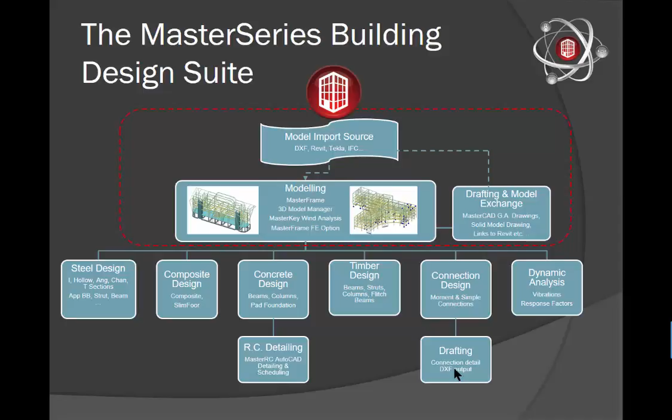And of course we can then send that back through into the likes of Revit and IFC format files through Tekla, and we can also produce RC details and even simple DXF details. The nice thing is you do not need to buy everything, you take what you need, and we'll explore that in greater detail near the end of our webinar today.

Just press escape from that and close it down. And if you're wondering, that is our new offices, 6,500 square feet we're in now. So what I'm going to do is go to my Revit models. I actually have them over here, sorry, my other screen. I'm going to pull up a little Revit model.

We can take a Revit model from the architect, from the fabricator, from whoever, and go into our own add-in, Master Series Link Manager, where we can create a link, save link settings, or submit changes to the link. This special little add-on we put into Revit allows you to submit all your data, and it's sending that out to Master Series. We can see we exported frames, columns, walls, two material types, 33 sections, one floor, some grid lines and levels, and everything. So just close that down.

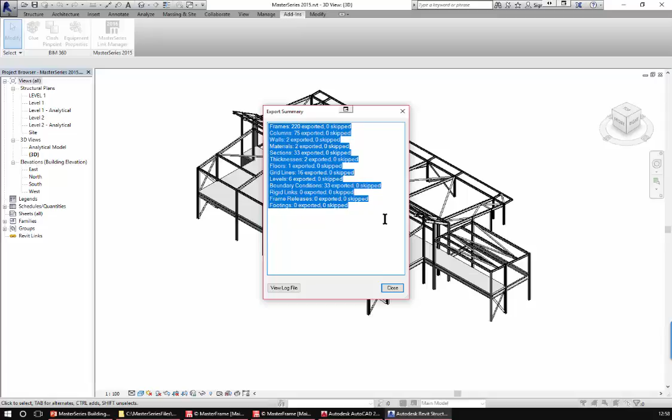So that's coming out from Revit. Just to save time, I will show you the model coming into Master Series. Here we are in Master Series, looking at the same model that's come through with all its cellular beams, and I think we did play around with this - we have a large section here, some finite element shear walls,

and we have some haunched members all coming through nicely into our Master Series model. We can also handle the IFC format, which is used by Tekla and others, and bring in models there. You can also start from scratch, bring in a plain DXF file, use it as a basis for your model, and draw over it to import your wireframe from there as well.

As well as importing models from predefined systems, we can also generate and draw our own models, and it's a very, very straightforward CAD style application.

So if I wanted to go in and create a new member, I can come in and say I want to put a UB, and actually put in a column. I'm going to say UC, and it's going to be 203, 203. So what I'm going to do is put it over here, out here, and that's snapping because of this grid, and then I'm going to raise it up, and if I just rotate this around, I'll be able to see that I'm snapping across there. So that's that column. I could of course have rotated it through 90 degrees beforehand, and if I just do that again and then repeat, we'll see that it's now in the same orientation.

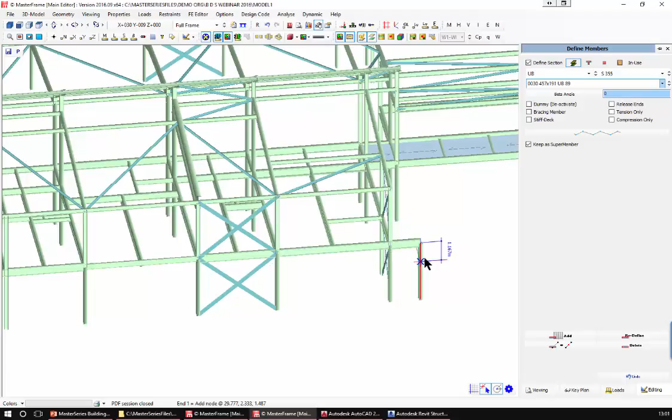So flicking over to a beam, we'll take a nice light beam. As you can see, I've got all the different section sizes and different types. I can now place a member, and in this case it's been rotated through 90 degrees. So just come back, 0, draw it again, and continue. I can also draw things into other frames.

So if I was to come along and say that I wanted to put some trimmers in here, I can just choose something very small, like not a W section, a CHS, and put in something very small here, say a 60 by 3.

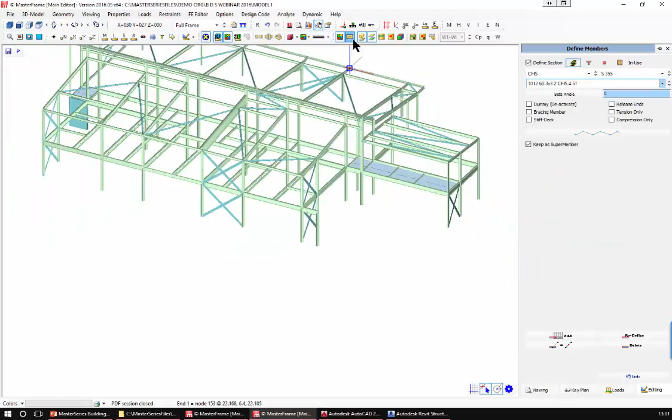I can come in, and if you look carefully, I can snap in this case at 100 mil centers, but I can just run along and type in 1.258, press enter, and it knows that that's my start point, and then I can come orthogonal to that, and I'll see if I turn on my lengths that that is the 1.258 length.

So I can override any distances. I have some fantastic tools in here for generating, and I definitely don't want to see my lengths anymore. If I take, for example, this sloping member, I could create, and we'll just stay with a circular hollow section, I could create another member coming down, and I can say I want to hover, hover, hover, and I get that as a member reference.

There we go, and I can now use that, and I can say at that slope I want it 1.9 meters long. So it's now drawing it at that member slope but coming out. So I have all the standard AutoCAD type tools, plus some more that we feel are relevant, and we're generating our members as we need to, and we can create plane frames, space frames like this without any problems whatsoever.

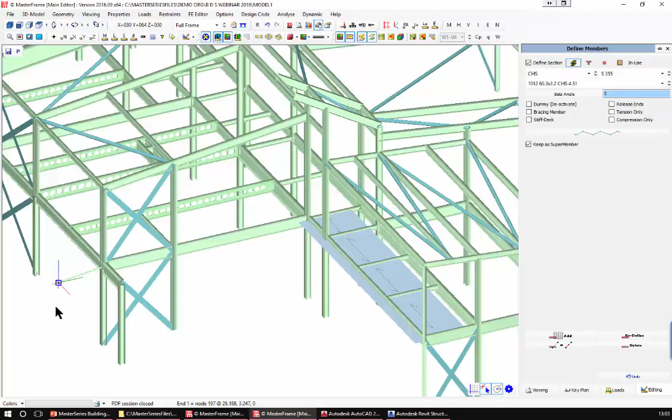So moving on, and if we look at this little frame in more detail, we will see that we already have the grid lines came in from the Revit. We also have all our levels input, and we have some panels already generated.

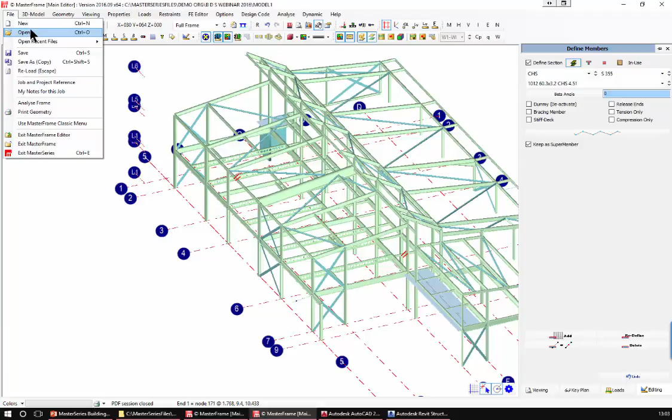But I'm going to close this down because I want to look at some typical frames for a moment, just to give you an idea of the sort of stuff that we do, or should one say correctly, our clients do. So I'm going to open a file.

I'll not save this. So I'm going to go into here and look at some typical frames: roof frames, a two-story building, nice multi-story buildings, a lovely building with a curved front facade, a school on 3 floors, and then we have another office block with a lot of overhangs, and a nice multi-story, I believe that was apartments.

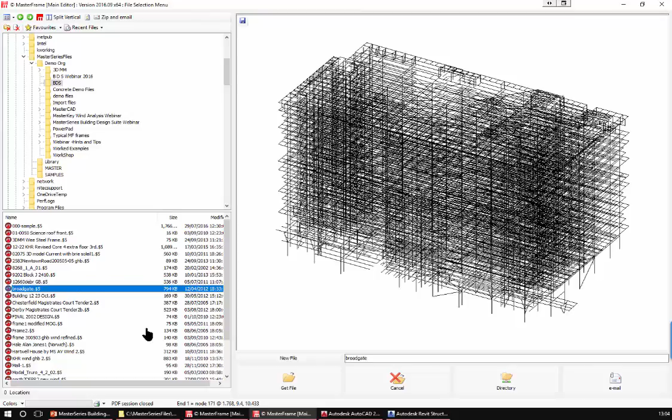So we can do quite a range of different, very complex models. This is just some of the stuff that our clients themselves do on a daily basis using this system for us.

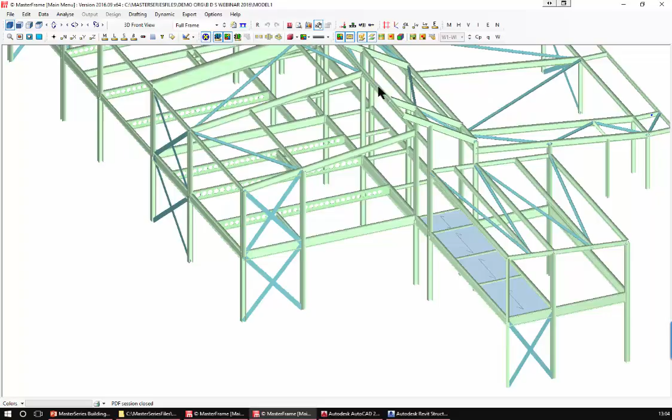So I'm going to cancel that, and I'm going to close this down because I don't want this anymore. And just to save time, I have another frame analysis in the background I'm going to work on. So just close that down and pop this one up. So this is the little frame I'm going to work on.

I'm going to walk you through this frame, and we're going to look at everything that we can do inside this frame. This is not a typical frame, because when we turn on the 3D, we will see, first of all, we have concrete in grey, we have composite beams in yellow, steel in green.

And we also have these big FE shear walls and flat slabs, and we have a shear core with some nice openings put through it, and if I rotate it you'll be able to see with the shading all the openings.

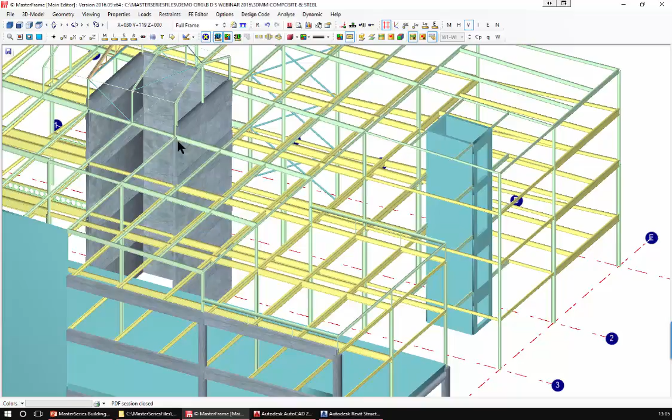And just because this is a frame I've used before, this is an old style rigid link type of members rather than the FEA. So if you're a smaller user and you want to use just a simpler method, you can.

And because this is claimed to be multi-material, I have up here got on my roof a portal frame with some bracing, and I just, for the sake of demonstration, put in a nice timber truss.

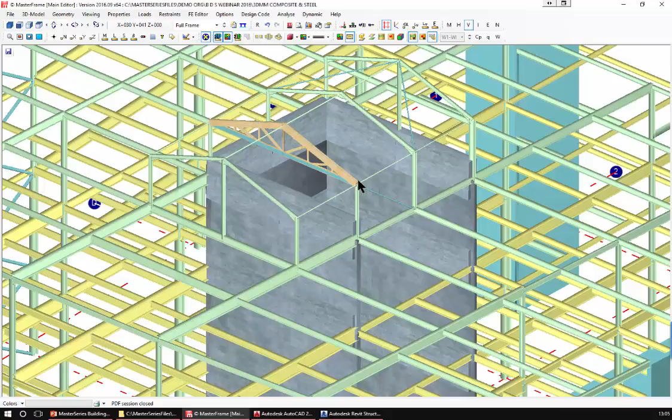And since it's a demonstration, I made the top and bottom members flitched beams. So this is a flitched beam with 2 plates on 1 wooden beam, and the top one is 2 beams and 1 plate. So we can do both styles of flitched beams.

We can also do them top and bottom if you so desire. So that's my basic frame. Not that basic, and we'll see we also have cell form beams and we have asymmetrical beams in the system.

So now, moving on, the next thing I want to look at is the loading on the frame, because that's one of the big things. It's easy enough to bring in the model from your CAD package or your architect.

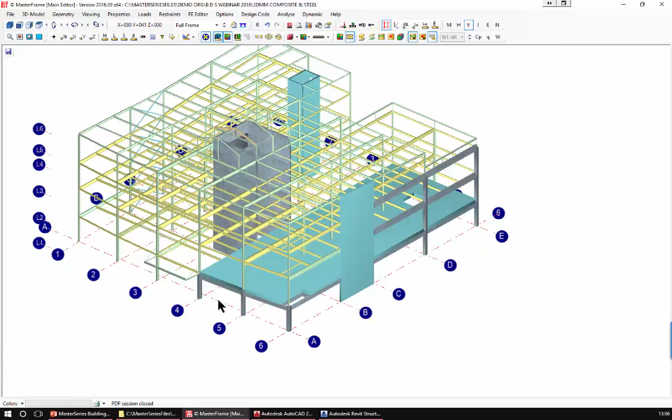It's easy enough to put the section sizes on. The next thing you have to think about is getting the loading on the frame. In the old days, you went member by member, not any bit more. These modern systems allow you to do something called area loading.

I'm just going to go back to wireframe, it makes my life easier. Now I'll look at gravity area loading. Using my levels on the left hand side, 1 to 6, I've set up at each level the designation and the loading: services, mesh, density, and the loads, superimposed, dead plus live load.

So we're seeing a 5 kilonewton load on the first floor. Second floor is the same. Third floor is only 2.5, must be domestic use rather than commercial. The roof is 0.75, and then the plant roof is 0.6 and 0.25.

So we've been able to set up on each level what we want to use for the loading. We've also been able to tell it whether it's composite, and we can see it is not composite on the portal roof - thank goodness. So I'll close that and move on.

So what have we done with these? If we turn on our area loading and draw the gravity area loading, we will see that we have different intensities on each level. Out here we've got a different intensity because we overrode the default for the level and said no, out here it is only 1.5.

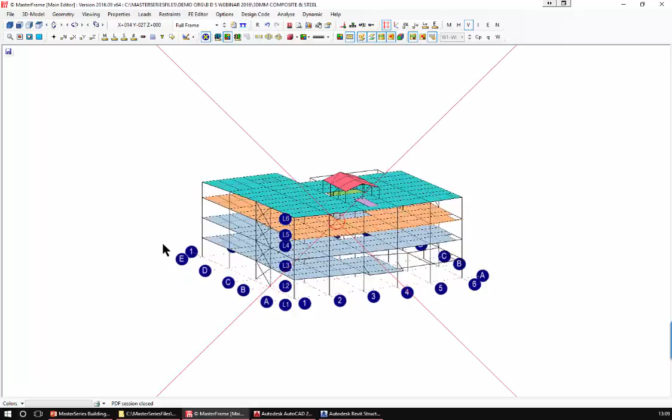We can also apply patch loads. So somebody has put in a plant patch load out here, and we also have the ability to place line loads. If I rotate around, I believe somewhere somebody might have put on some line loads - there were some, but it must have been deleted, not to worry. I can put a line load on very quickly for you. So that's how easy it was.

Apologies, I'm just going to turn all that off and come down into a level. So let's go and view level 2 - this is my level. I'll put it into an ISO view so it looks nicer. That's just coming up from the shear lift shaft, we'll not worry about that.

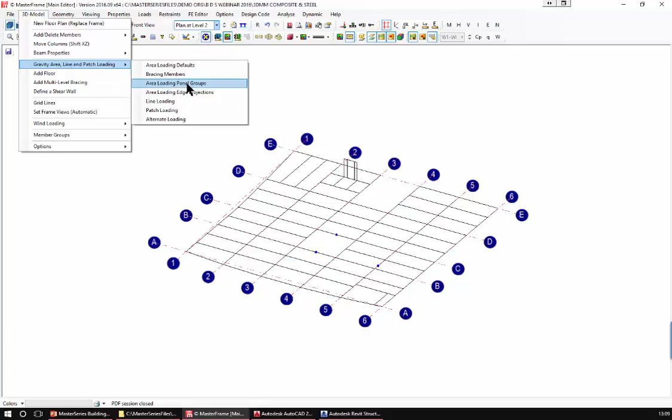But coming through into my areas, I can now look at the panels. I can see this panel's been defined, and if I find this level and click on this one, I can see that we're all spanning this direction except for these ones over here which are spanning in opposite direction, because I told it to go by shortest.

If I wanted this one and this one to also span the same direction, all I'd need to do is make a local change, choose the panel and change the direction to be that way. Take this one, change the direction, and I've overridden that. While I'm here, I might as well put an additional 2 kilonewtons of additional load onto that panel.

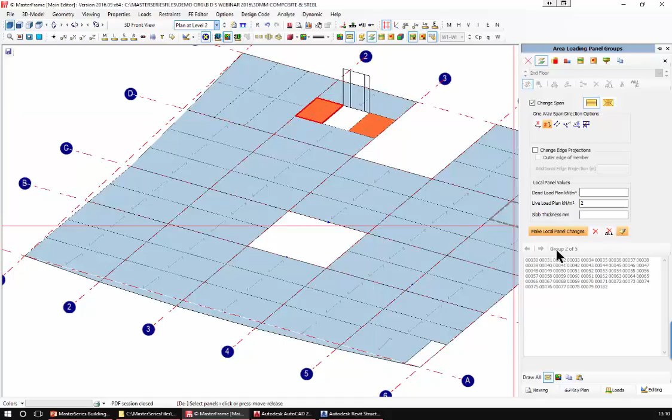That's how easy it is. And if I wanted to, I could then copy that over to that one as well. So I've now changed the loading on those.

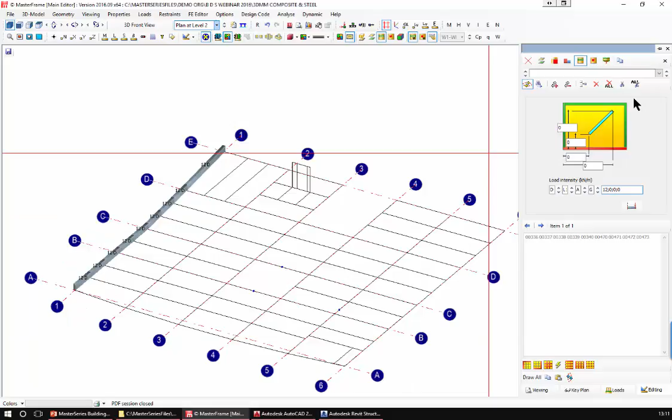I said about line loads, so let's put a line load on here, along this back wall. I'm going to put it all the way along here, and give it an intensity of 12 kilonewtons.

So that's a 12 kilonewton line load on that level, and I can put those internal, external, wherever I want. So now we have changed some of the areas and made local changes to the loading. Let's go back out to our full frame and look at the area loading again.

We should see when we put on our patches and points, we now have this line load - I don't really want the values shown, not as pretty at the minute with the values. And we'll see back around here on level 2, there's the two panels we changed the direction of and applied an additional loading onto. So loading is very simple to apply and very, very powerful. That's your general frame.

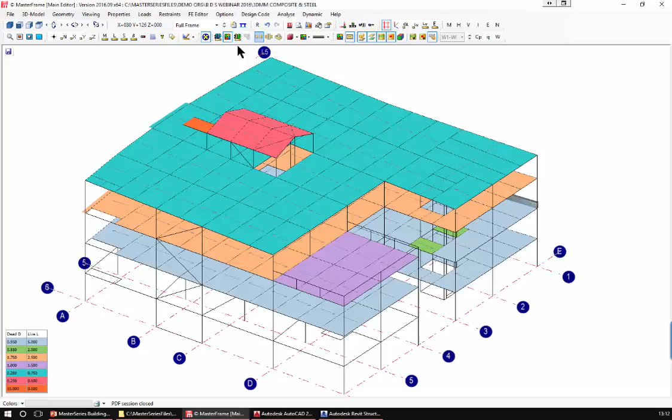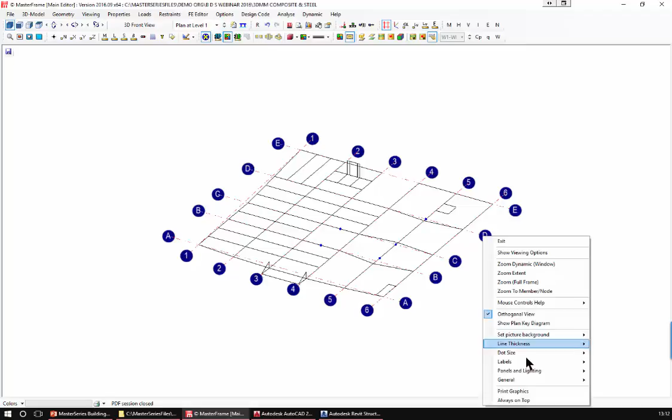The other area we want to look at here - if I come down to the first floor and turn this off, we have FE meshes. So we have an FE frame, and if we go into the mesh, we'll see this is all one area. I'm going to ask the viewing options to show the FE meshes, so we're only looking at the FE panels. If I now go into the FE editor, I have my surface, and I also have attached beams around this, and openings. I have an opening here, and I also have my loading applied - several different loads, some line loads on the FE surface, a couple of point loads, and an awkward line load on the FE surface. So it's very flexible and powerful.

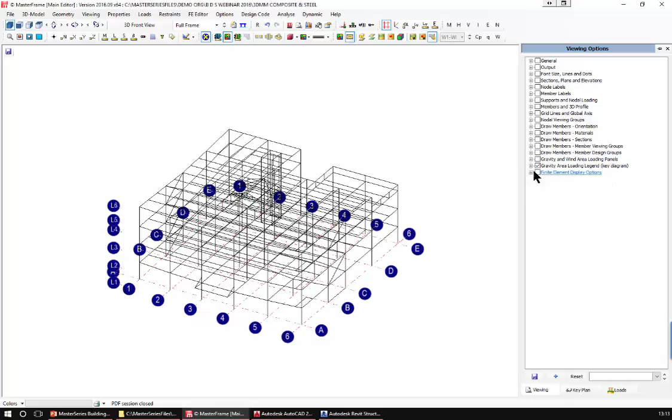If I now come back out to the full frame and go back into the viewing options, ask it to show everything again, thank you very much. Now I'll just turn off my grid lines. The next area is wind loading, and that's obviously another minefield.

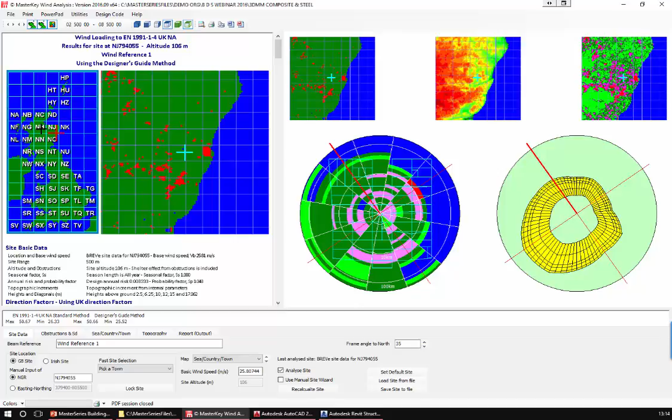So if I go into my wind loading, I can go in and say where the building is. If I'm in the UK or Ireland, I can immediately go into either my GB site or my Irish site and locate my building, which is looking to be, if my guess is right, up near Dundee somewhere. I do have some basic towns I can choose - if I go Dundee... no, I was a bit too far up, I was probably at Aberdeen, not to worry. So we're now in Dundee, and we can see our fetches, the topography, the orientation of the building, everything in here. We can see our roughness factors and our altitudes, all the details, and we can come down and see all the different pressures at the different levels in the structure - it's automatically pulled all that out.

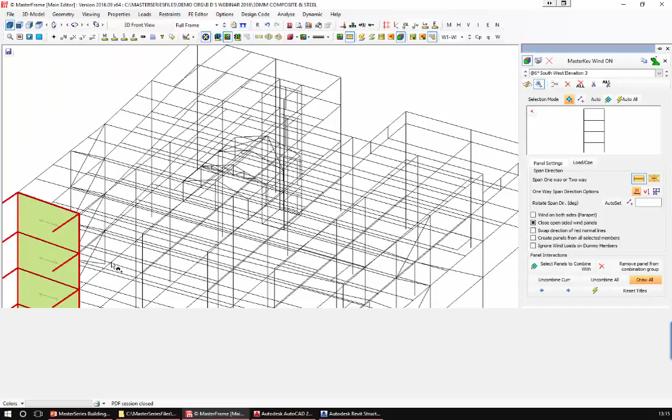So all I need to do now, having chosen my site, is to apply the wind loading surfaces to the members. So let's look at the wind panels. Don't know why I've lost a wee bit there, just a second... and I pull that back again. There we go, Windows just wasn't updating the screen.

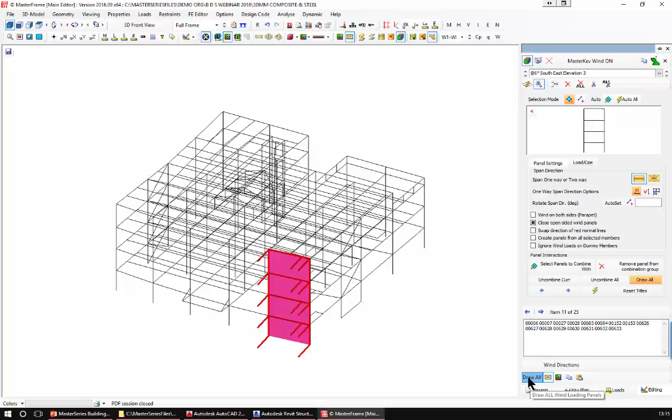So these are my little wind panels that I've got on the structure, and if I look at them all, you'll see I have quite a few different panels generated. So what I'm going to do first is just kill those, kill them all. So I have no wind panels, and I can come along and add a panel, saying it's from there to there to there, and even these - well, it doesn't like those because they aren't part of the same group - and up to there. I can say I'm going to span horizontally or vertically - I'll stay horizontally because it's going to be sheeting of some sort. And I can then go and do another one. But of course we don't need to, because what we can do is delete all that again.

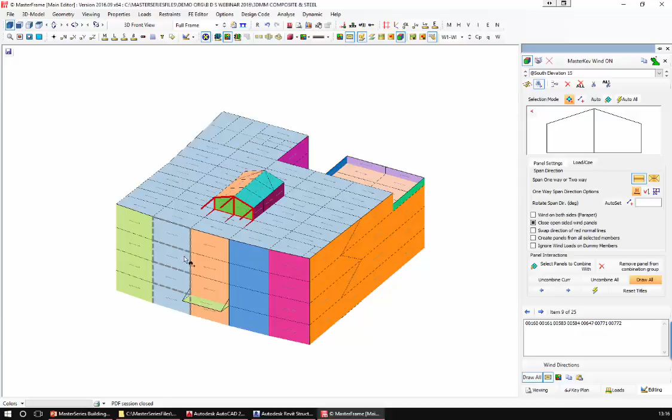Instead, I'll ask the program to have a go at finding all the panels itself, and in a few seconds it's identified that these are curved surfaces, so each facet has its own surface. You'll see we have a parapet separate from the rest of the wall, and we also have here a canopy, and then our dual pitch roof loading. So that's my wind loading all done automatically, very simply and very professionally.

So let's just display that again outside here, and then let's look at our wind loading. We can see the pressures, with our high suction getting lesser and lesser as we come across the structure. If I turn on my Q values, you'll see it's 0.6 coming down to 0.2, and we're getting another capture in here due to the re-entrant corner. Wind blowing in this direction, we go from high pressure down to low leeward, and then again in the opposite direction - we'll see all of these coming through nice and neatly. Then with internal pressure, if we want to consider internal pressure or even internal suction, all these are automatically calculated for you, and you can even look at the coefficients rather than the actual intensity values, and away you go.

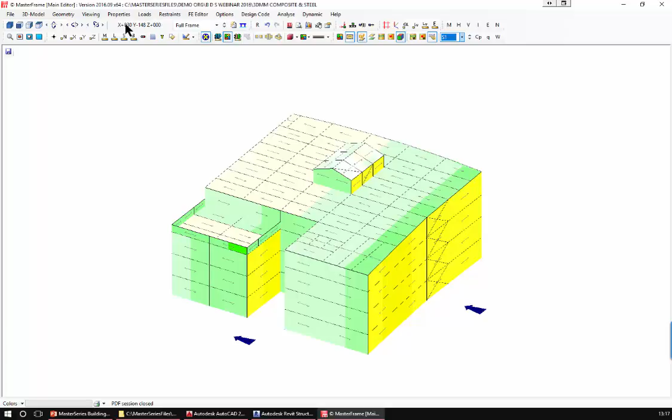So that is so simple in its generation. Now lastly, in the analysis end, we need to look at loading cases.

So loading cases, we have our loading combinations, very straightforward. We work primarily with the two design codes, British and Euro codes. We also have South African, but our primary codes are British and European. We do not do American, and we do not do Indian codes. I know that was a question asked by some people, and I apologize, I should have said that earlier.

Now you have all these different loading cases and permutations set up, including sway stability as equivalent horizontal forces and notional loads to check the stability of the frame and all that. They can get quite complicated, but we also have this system where we can come along and generate different permutations of loads.

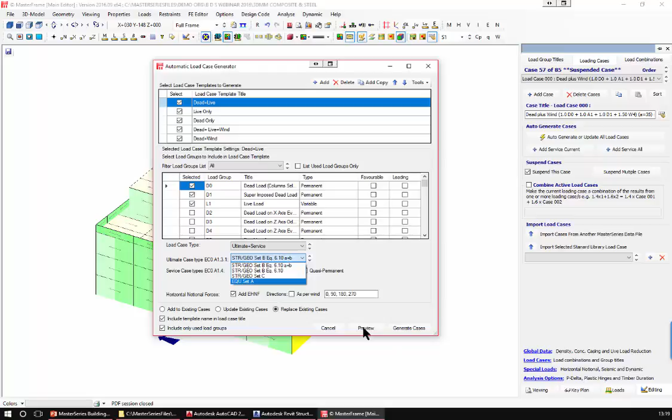As you can see, we elect to use 6.10a and b, but you can decide how you want to do it and apply all the values. But I'm not going to do that because I've already analyzed this frame, so I'm just going to say cancel.

So loading combinations, superb. We can also do the P-delta analysis. You can have plastic analysis, saying this member could form hinges, and as it analyzes, it will form the hinges and redistribute if required. So I'm just going to come out of this, and I'm not going to save it because I don't want to spend the time on the reanalysis.

So there's my frame, and in case you haven't gathered, all the different colors represent different section sizes. Now I'm going to turn off the multicoloring, and we want to look at output.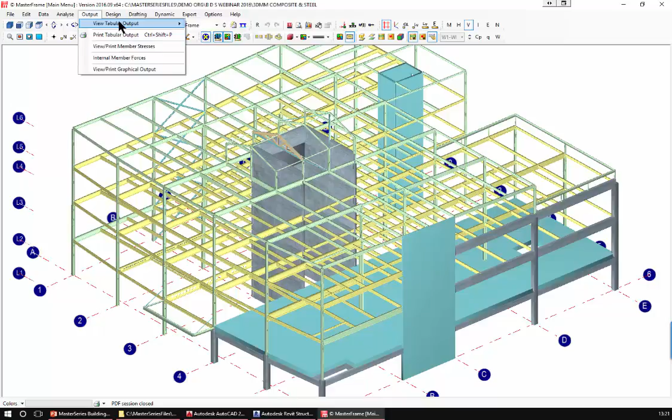We naturally have all our tabular output as you'd expect, and we also have graphical. So in wireframe, there's your FE mesh, by the way. You have all your bending moments.

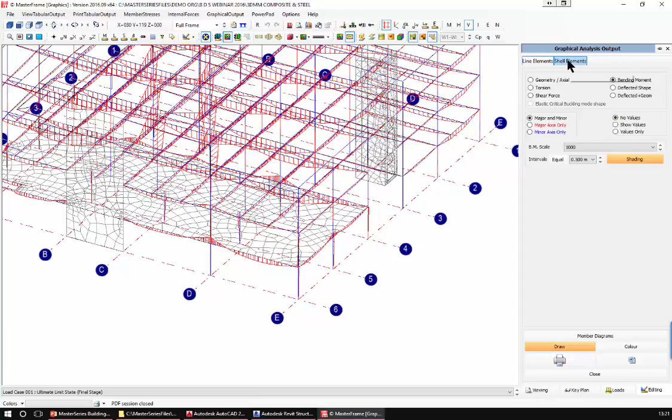If I come back out and change the scale, you would see that kind of makes sense, what's happening there, and you'll see the moments around the edges of the FE slab because we're doing a combined attached-to-beam analysis. And we can then go into the shell elements for our surfaces.

So I'm just going to look at plan level 1, and the first thing we're looking at here is I'm just going to come down and look at one of these loading cases, and I'll see my maximum MX moments on my structure.

I will also, just to give you an idea, I always think it's a good idea to check the movement of the structure, see how it's working. This is our deflected y-axis, and if I go to contour map, again I can see how that's working.

So we're under all spans loaded here. If I do my alternate one, so I have max here, min, max and min. Obviously this one's got a big opening, which does compromise its stiffness, and therefore it does want to go down.

But if I then switch over to the second alternate, you'll see min, max, min, and oh, that's not very happy, max. And then of course we do the same in the opposite direction.

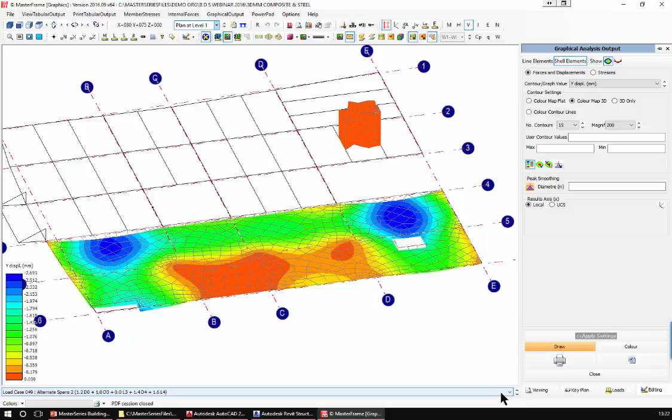So we get our maximum over here and our minimum here, I believe. Or is it the other way around? No, it's minimum here, maximum here. And then we flip that side and do the opposite there. So we're able to do all our nice patterns of loading on our FE shells.

So that's your displacements, that was your MX. More importantly is the MRX and MRY, the wood-armer moment. So we can see the big spikes here.

And I have already asked it not to do peak smoothing. With peak smoothing, we can take out the big contours. So if I go 3D, you'll see, actually 3D color's nicer, the big peaks here over the column heads.

And I didn't mention before that my superstructure columns are not coincident internally with the ground to first floor columns on this slab, so there are big problems there.

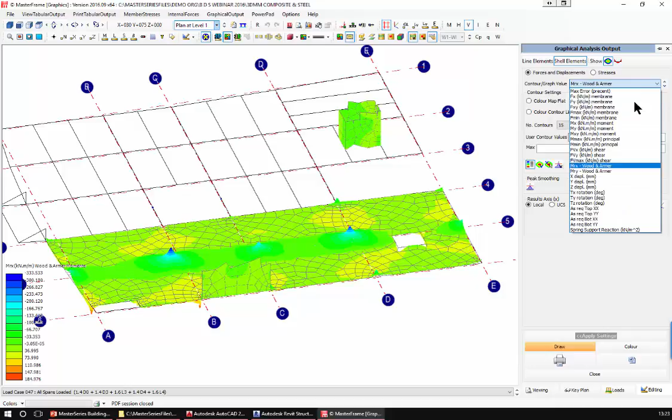But we also have a lovely additional tool that we can use in the FE as part of it, and that is these strips. So if I look at my strips—did I save my strips?

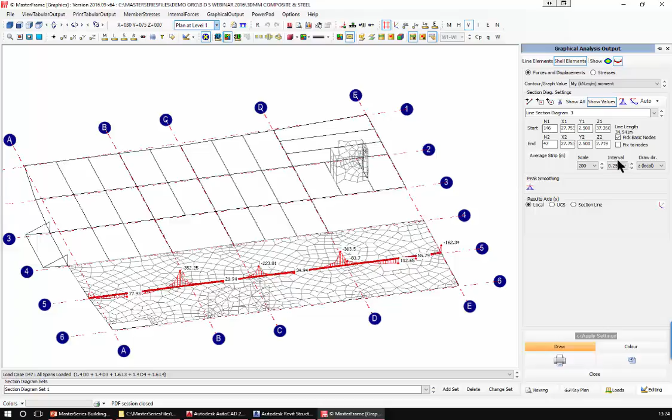There we go, that's strip 3. And if I look at my MX or my MY, we will see the nice diagram. So if I go up to the MX, that's spanning that direction, and if I come down to MY, I'm just going to scale that up a wee bit so you can see it. So 313 is my major moment here, and 352 there.

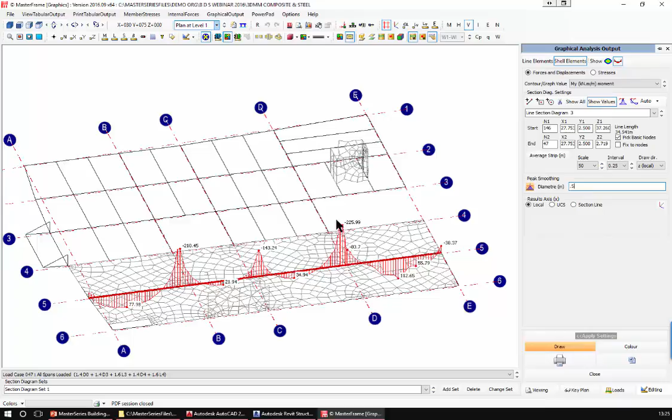Designing for that will certainly work, but that's really overcooking the whole thing because that's a point peak moment. What we can do is a bit of peak smoothing. I can clip these to 0.5 of a meter and apply, and we're down from 300 to 225.

But more importantly, we could turn around and say, well, I want to average this over 1.5 meters. And that's pulled it right down. So over 1.5 meters of column strip, you only need to design for 200, not 315 of force. So these are all very, very powerful, useful tools for designing your slabs.

So that's just a wee bit inside the FEA. Let's now move on, we are at pace, so we've looked at analysis and FEA in the first half hour. We now want to cover all our design, so closing that and coming out, we want to go into design.

Let's go back out to full frame, and first of all let's look at steel design, at my member here. And if I just go and say, right, let's look at the roof, because really the roof is the most important area, because most of the rest is composite.

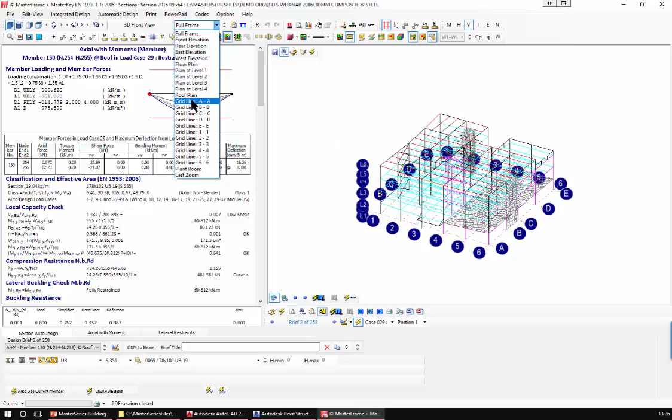So what I'll do is I will just go for roof plan. That's the plant room roof, so down one. So we're now into the first floor, and I can see each of these members is giving me capacities.

Some work, some don't. So first time round, I can come along to this member and say, you go and auto size that. I can also ask it to auto size all the visible members. That's brilliant. But just for a second, imagine we have auto designed it.

How do I know that they're all working? Well, that is where we use the fail button. We can scan this view and it's going to run through and find for me if any members fail.

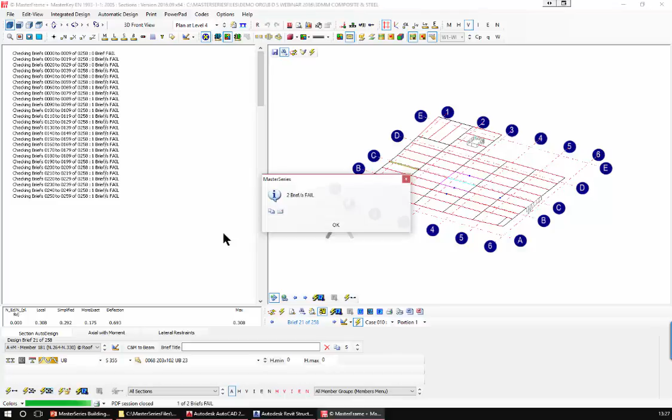And just while it's doing that, I think Martin has looked after all the questions. Only 2 members fail in this area, and it takes me to the first one that fails.

But one of the nice things is we can then move to the next failure each time, and we can go between the two members that failed. So it's this one and this one.

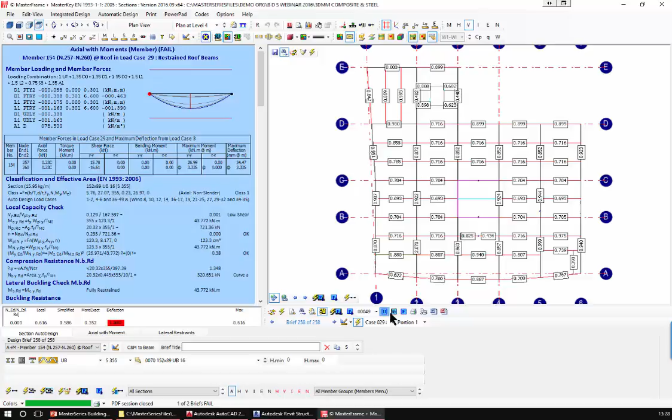And then I can actually, putting it back into plan view, I can now see all my unity values for all the members except for the one I'm looking at. We can see that fails by a value of 2. That's failing by 1.8. I can now reduce that to the most critical for each section size, or more importantly, just to the failing ones.

So I can go to that failing member and ask it to resize. Go to this failing member, and it's also tight. Ask it to resize, and about that effective length, because it's taken all the intermediate members and used those to restrain the members automatically.

And we can see this works. So that's a 54 section, but I could possibly, by scanning and sorting by weight order, get down to a deeper member that would work, and I might just do the same over in this member as well. So that was that member.

Back to this one, it's a very light section because it's in the roof anyway, so not to worry. But the others are sorted by weight order. I wouldn't like to go any lower than that.

And we have tools that can allow us to filter. So we can actually say in our design, never give me anything less than 130 wide flange. I can limit certain criteria, or I can tell it never give me a depth greater than 500. So 457, great. 533, no, won't like it. So we have those sorts of tools and facilities as well.

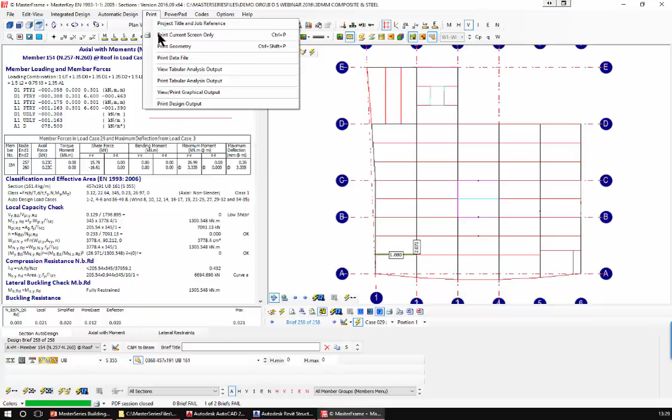From an output point of view, it's just telling me I should reanalyze because I've changed something, but I'm just going to scan for visible failures, and it's going to walk through these and give me the unity values of all of them, trundling all the way down through them, and then highlight the ones that are failing. We've done our design of steel.

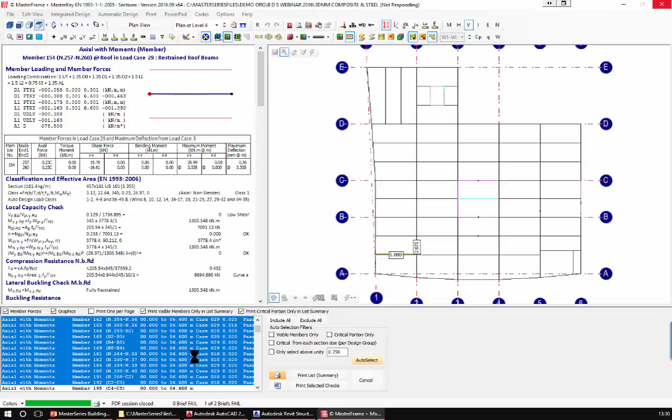We can then go in and look at our concrete design and say no, we're not going to do our pad foundations anyway, we're going to have it onto piles or something, so we won't be doing pads. So we can design our attached beams, and yes, the attached beams can look strange.

I'm going to up this to 16s, 420s, and that's all okay. And then in the bottom, I'm going to increase that from 16s to 20s, and that now is a solution that's working.

If I come across to somewhere like here, we'll see also on my design of my L-beam, I have quite a deep 450 deep slab because of those point loads from the upper floors coming down. It carried an upper floor plus a roof onto that slab.

On my upper levels, I then have a more traditional set of reinforcement, and you can see that I'm able to put 2 layers of reinforcement, and we can see our shear drag and everything for our design.

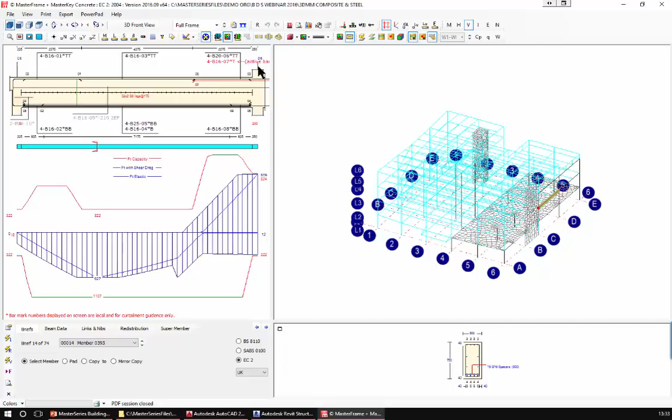And anything here that I see, I can say, well, would I get away with only 3 bars or 2 bars? And no, just using the mouse, I can change that. And we do have the auto design function as well.

Column wise, so I said I wasn't doing the pads. Column wise, they're looking to be good, upper column, and that's looking to be good on upper column. So I can design all of my columns, all my beams, and the slabs were designed inside the FEA because that's an FEA criteria. And that is how simple it is to do the concrete design.

We can analyze and design single members. So if I took this column, I could just analyze that and resize that, and it comes back correct. If I was just to go and change that from 16s to 8s and then resize, you'll see that it comes back saying we need 16s and 2 16s.

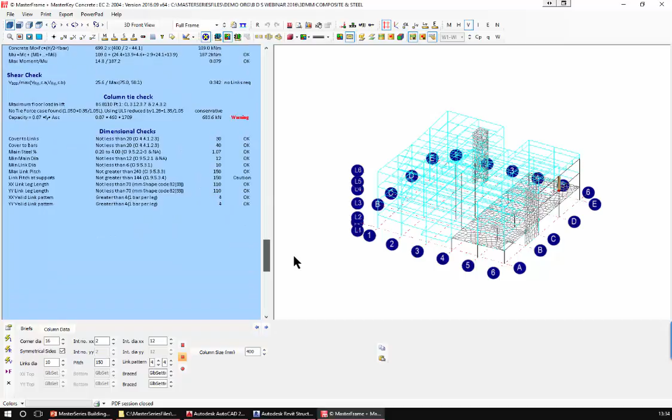You might get away actually with 2 12s. No, we wouldn't. We wouldn't get away with 2 12s per side because we are going to have a problem with our tie force check from the loads above and below. So I am just going to, for tension purposes, bring it back up to the 16s.

And we can export that to DXF. We can print out our diagrams through into AutoCAD very straightforwardly. We can also interface with our Master RC program.

So we've done our steel, we've done our concrete. We haven't saved anything, so we can go straight back into composite design, the third material.

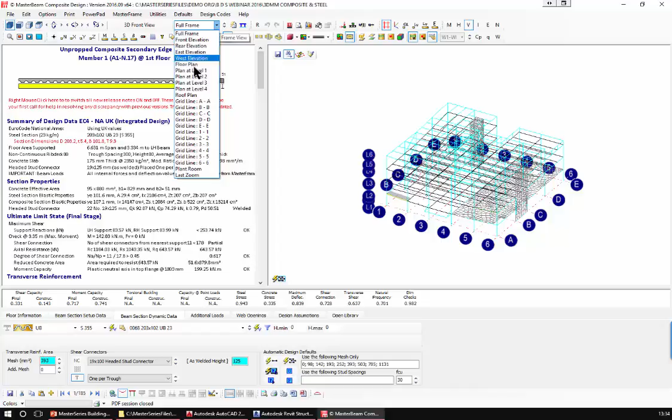Fourth, if you consider the finite element. So let's look just at, say, level 2. And again, secondary beams, failing, passing, or not passing, failing, and primary beams. So big primary beam here, and it's failing.

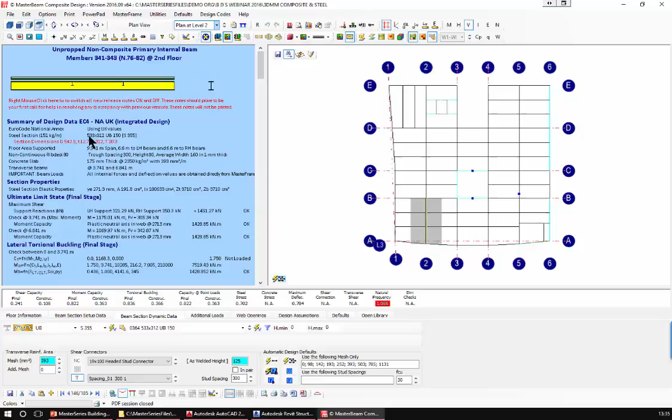I can ask it to go ahead and resize that, and it's going to attempt to do it, and it's not getting very far. I forgot I still have this 500 limit on my sections. It is working other than the natural frequency, but we can ignore that, as we would probably do a response analysis on the whole floor. So we have that facility.

Naturally, you also have this showing up of all the unity values on the members I've already looked at. So scanning for failures would actually show up all the ones, or you can just pick them one at a time, and you can see some of these are working, some aren't, because we haven't gone through and done an official detailed design, including on all our edge beams. And we can do that quite easily, but time is of the essence.

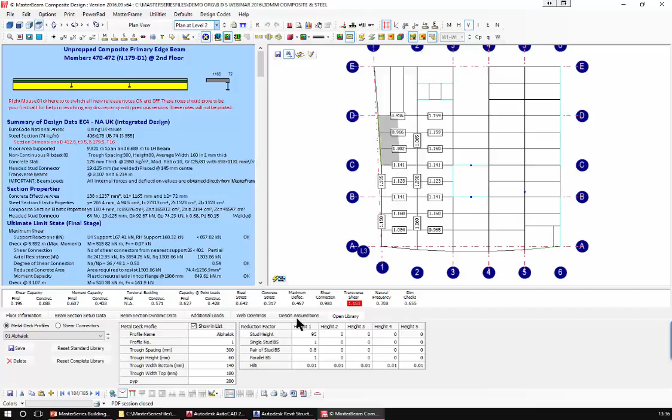We can at any stage design web openings, so if you wanted to put an opening into a beam, you can, although in this case the opening would have been defined in the frame analysis area, so we will ignore that. And we have the libraries for all your types of deck profiles and studs, and you can create and add your own in here as you desire. So that's your composite design, and I'm going to come back out again without spending too much time.

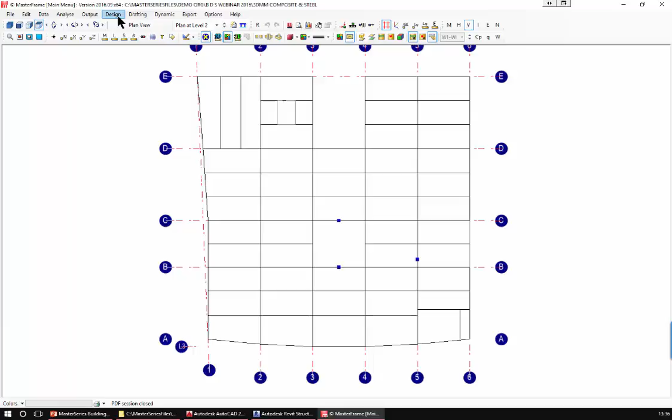And what's left? Two things left in the design. One is our ability to come along and design the connections. So yes, we can design all the connections in our frame. So let's go in and use our connections.

I've already set up some connections to save us some time. So in my portal here, I have a nice big eaves joint.

There we go, so there's my eaves, and I can see my design. The only thing it's annoyed with is that because my portal was actually very light, it's come up with very small sections, 127 by 76, because it's not spanning far and it's only 3 meter centers, so it's not that heavily loaded.

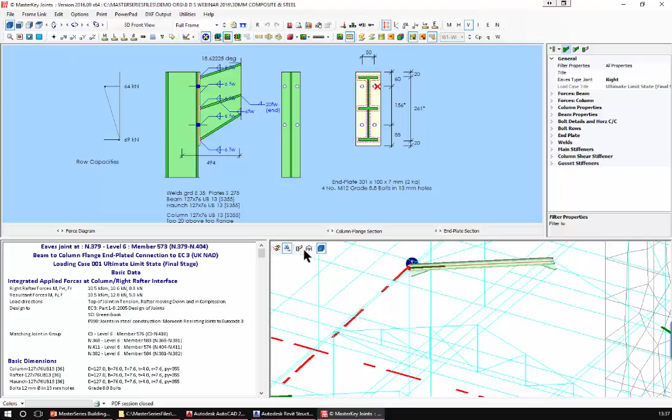You probably wouldn't need a haunch anyway, but the bolts at 50 centers are a bit too close together. Let's look at something a bit more detailed. If I come down and look at a more typical connection, I think this is going to be in level 1 or 2. Yes, it is.

On level 1, we are designing this beam to beam flexible end plate, and we can see that we can get away with just having 2 sets of bolts. Since there's room, I would come along and say bolt geometry, vertical spacing, push them down to 90 just to give it a bit more of a look. We could obviously try and push that back to 70 and put in another row of bolts if we so desired, but we'll see that the thing is perfectly sound and working.

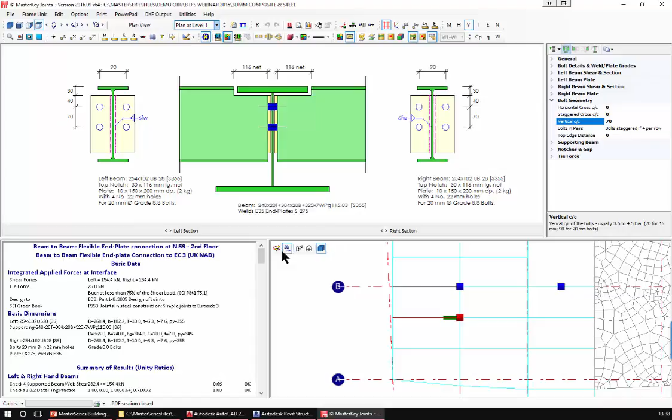Now, I can also in search mode see a more detailed design check on a column, and I will actually see that I am struggling in this case to design the bolts as a fin plate. So the fin plate connection is not very happy here.

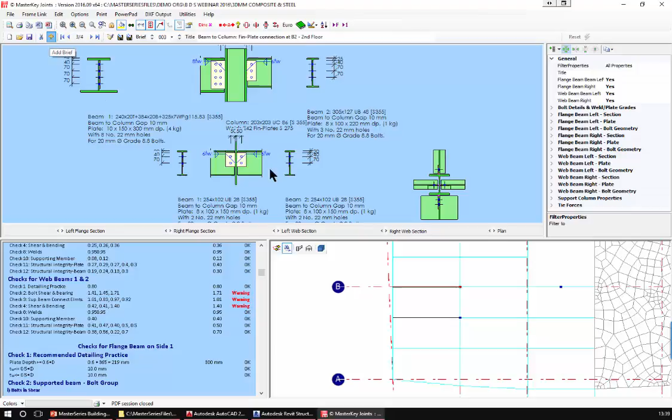So what I'm going to do is turn off that smart menu, add another joint, and this time simple connection, beam to column, flexible end plate, and I'm just going to link it again directly to this member, and we should see that we get less failures.

We do have 1 or 2 little problems, and that is to do with the effective depth of these little end plates down here on the webs. So we would just need to come along and set the web left plate depth to 200, and on the right plate say the depth is also 200, and everything's fine.

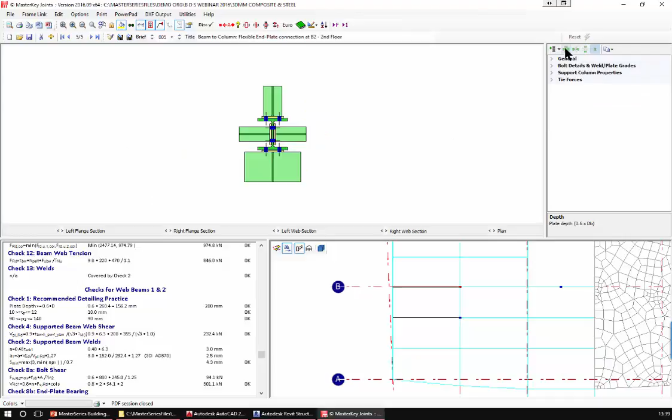There's just so much data here it's hard to see, but you can turn around and say only give me the web or the flange design, and we'll see our configuration there, or the column plan. Looking at this, we'll see that, again, we have this gap, but the way it's designed, it will work perfectly well. So that's your main criteria on your joints.

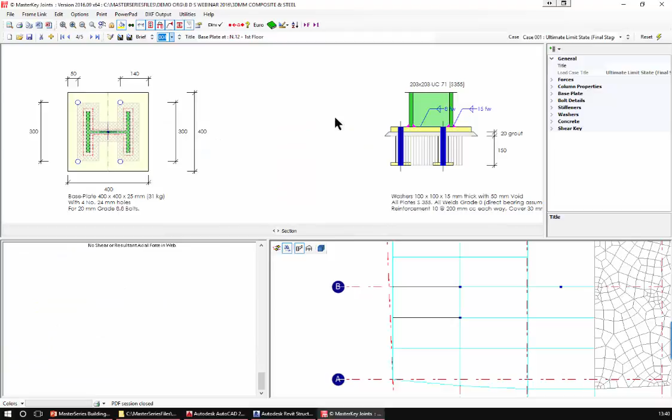One of the other nice facilities is the ability, if I look at one of my base plates and come back out to look at the full frame, you'll see that I am getting a green with others. So what I've done is linked this through to these, so that they're designing not just the one loading case, but in fact all the loading cases for all those members. We're designing all of these all in one go, and we can see now that we have a little bit of a problem.

It's just not happy with something, and it is a dimensional failure rather than a detail. Let's see what's wrong with it. Oh yeah, we've gone for 400, and these are huge columns. We need to go out to 500 wide so that we can get everything working fine. The base plate, although technically it would bear properly and there's no bolt tension, it's really annoyed because there's just no room to get the bolts in without them clashing.

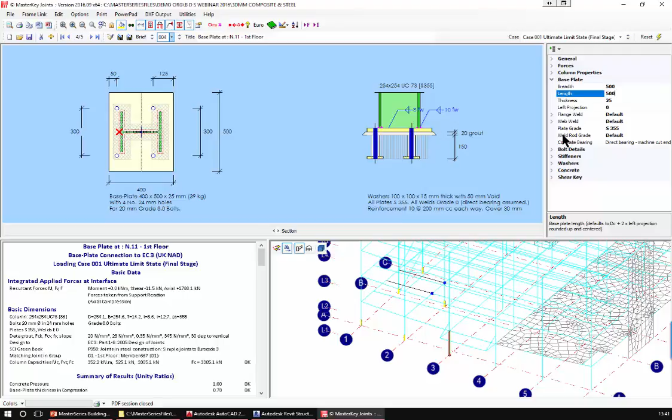So 500 by 500, nice well spread out bolts, and everything now has gone white and is fine. We're looking at our different cases for all the different joints, looking at all the different joints that are highlighted here in yellow, all at the one time. We're able not just to look at the one loading case, but actually look at all the different loading cases, and we can see that it's automatically now working perfectly fine and has no problems.

So I just check my mic's still working. Yes, it is, I just hit my little switch. So that is all okay.

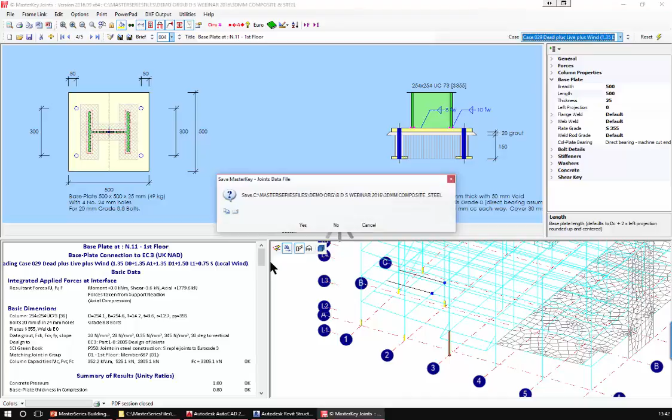So that's your connections, and I'm just going to close that down. Now, in this case I can save it because it's separate. The last design component is the timber.

So let us go and look at a defined view of the plant room, and I can see that these little members are working. We are using C24, and we're using a 38 by 122 - in old money, 1.5 inches by 5. We're down to the smaller sections, and we'll see they all work fine.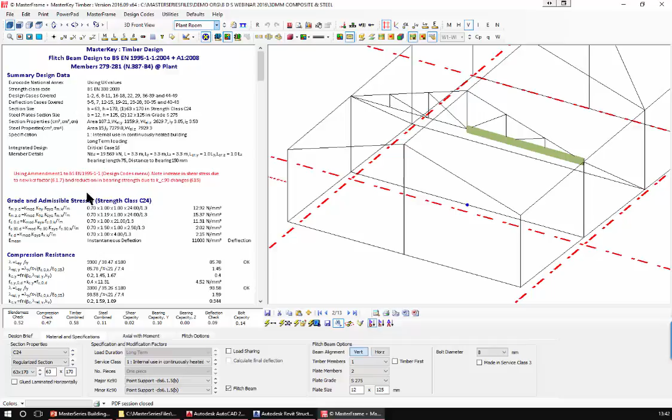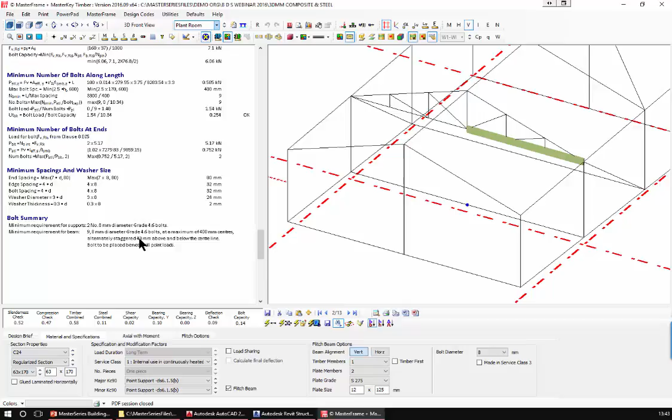Our beam here is a flitched beam, and it is giving us all the design in this member, then the bolt shear checks, the bearing checks, and the spacing checks. So we need 9 8mm bolts at 400 centers maximum,

and then staggered above and below the line to get best benefit. It's very detailed, and if you zoom in here you'll see actually that it is - I've just lost the color on my plates. I don't know why, it should be showing up in the plate itself in blue, but not to worry. So timber, steel, concrete, composite, timber, and connections, all in the one building environment.

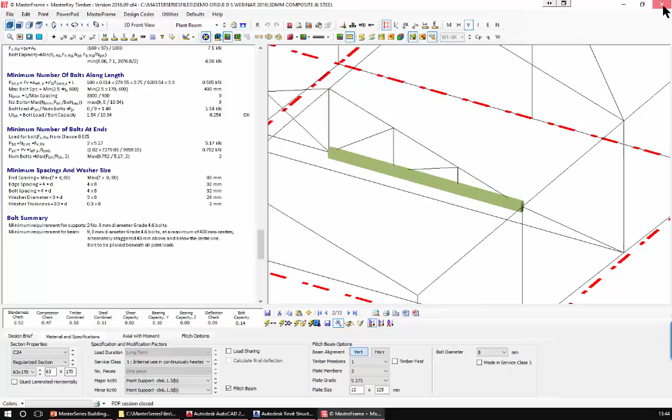Your full wind load, your full gravity loads, bringing in from Revit, all of that in the one system, and doing your finite elements. So I'm just going to close down here and think about where we take this.

Where we would take this is back into BIM, and we could come along and say let's export this as an IFC and bring it into an IFC viewer, or into Revit, and we can link it to an existing model. So I want to save the changes to the existing, submit the changes to the link, and export everything - that's updating the link.

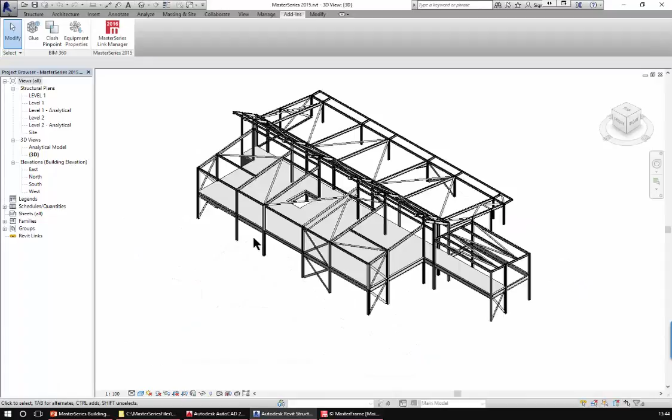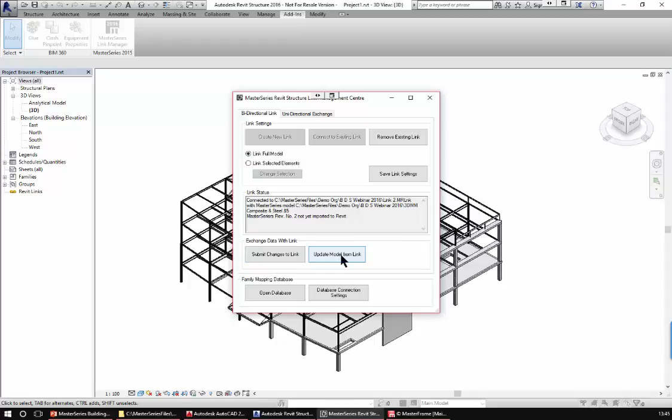And I actually have this model. So if I go to this - it is this one here I want - and bring it in, and there's my model. I can actually go into add-ins, MasterSeries link manager, and I can update the model from the link, and it's going to come along with its little hourglass and update this existing model.

So update levels, update elements. I'll leave the levels alone and just say OK. And it's no changed elements because I didn't actually do any change, and just say close. So it's updated the model in this case with no changes.

Now I have gone through 8 or 9 different subjects here, and each one of these does have its own webinar - on steel design, on composite, on connections, on BIM integration. So there are some great videos out there on our YouTube and website for you to get great benefit, more in the teaching rather than this showy display of the interface.

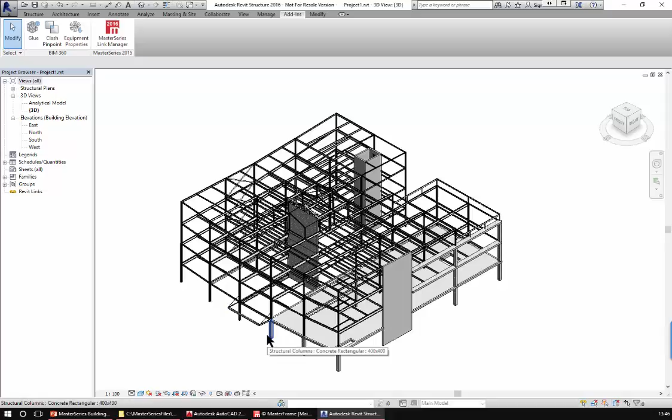So that's your BIM. We also have the ability to take a drawing and export it as GA drawings. So I can turn around and say give me

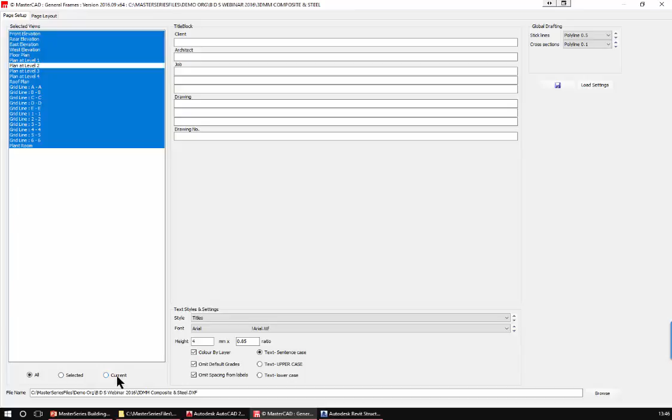all of these, or in my case maybe just level 2, or level 1 - maybe level 2 actually. So let's just take level 2 or level 3, even level 3. And I can then say I want it drawn A1 at 1 to 100, and I want to draw it as a wee simple stick

outlines, and I want all my forces. I want my shear forces and any moments and any axials, and I want them on the beams only. And I want to have them such that I only know about shear forces over 75 kilonewtons, axial, shear over 25 - that was first moment, shear, and axial over 50,

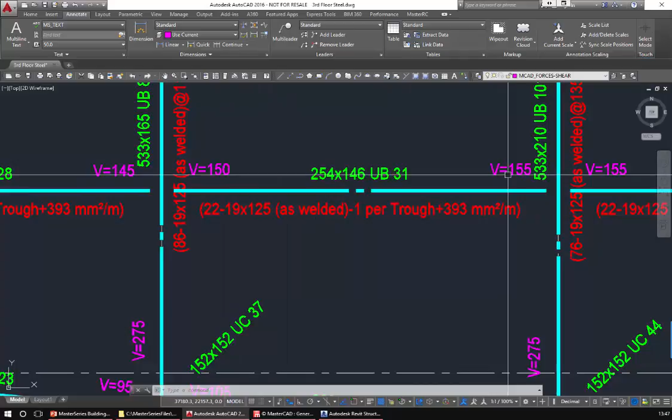and precision. So I can then export that, but I'm not going to do that again because AutoCAD itself, as you know, is very slow these days to load. So what I've done is I've done it already, and as we can see, we've got our members as little stick lines with their section size, our shear studs, and our mesh, and our shear reactions.

These are all standard layers. As you can see, I can come along and I can turn on and off layers as I desire. So I could turn off my shear forces and therefore they disappear. I could turn off my mesh details. I can turn off whatever I want to keep this as nice and clean as I can.

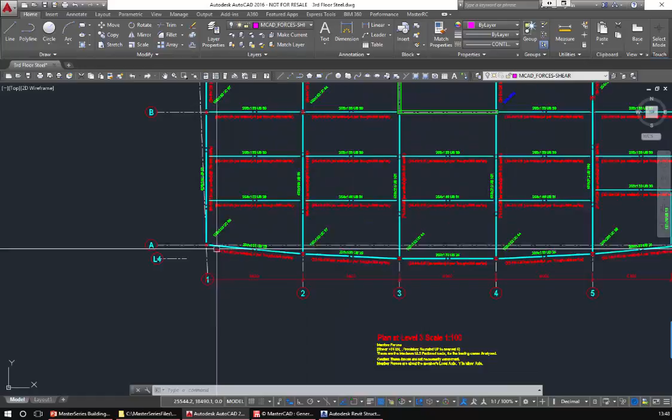And that's just a simple DXF export. I'm in AutoCAD, but it could be any CAD package because we export in a basic format. So the only thing I have not covered here is vibration analysis, because it's not something you can really cover in a very, very brief, short time.

So instead what I would do is point you to my website. Under videos, you will see there are some excellent videos, and there's a fantastic video here that Dr. O'Gara, my colleague, has done on dynamic analysis.

I'll just turn off that noise, I don't want to really hear him talking. It's more important to hear me.

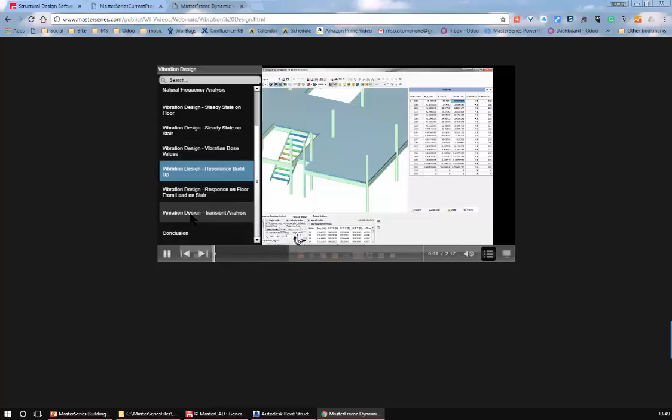So you can go through and see dose values, all about resonance build-up, and all about transient analysis. Everything here is covered in nice detail for you, and that is available to view at any stage on your dynamic analysis.

This frame here is a slab with stairs, and we actually look at the response in one area due to the footfall in different areas. It's a bit like saying will the operating theatre start to vibrate when people walk along the corridor outside. So that's all available to you.

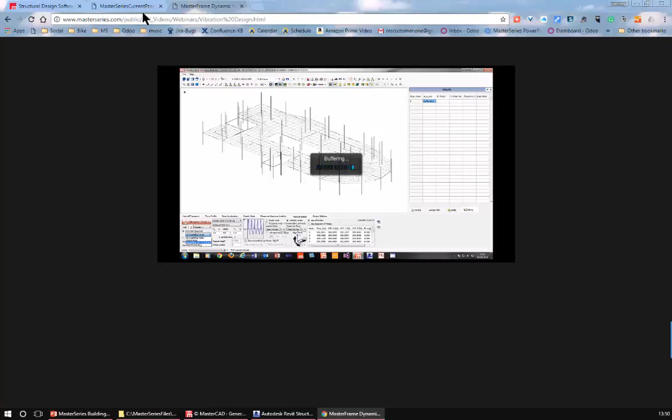So I just want to summarise, and I think one of the best ways to summarise is to look at not the website but our little pricing program, our little pricing sheet. We have 3 different routes: you can go for your building designer suite, you can go for your PowerPad Lite, or you can build your own. The building designer suite is made up of our programs all bundled together very conveniently in nice tailored systems.

So you don't even have to think - right, I want to do steel and composite buildings, so I would need the 3D model, 3D analysis and the steel and the composite. I don't need timber, I don't need connections, I don't want finite elements, and I don't do vibrations, so I don't need those. I can get away with quite an economical solution.

What you also have to remember is that the prices will vary. If you contact us, you will get them for your own country, and everything comes with 12-month technical support, and also we do offer good discounts on additional copies. So if you want a second copy today, a second copy tomorrow, there is a very powerful discount.

Now, some might say, why do we have this modular system? Well, just for what I've explained, that you don't have to take everything at once. But also, if you were networking it on a large system, you can make even greater savings.

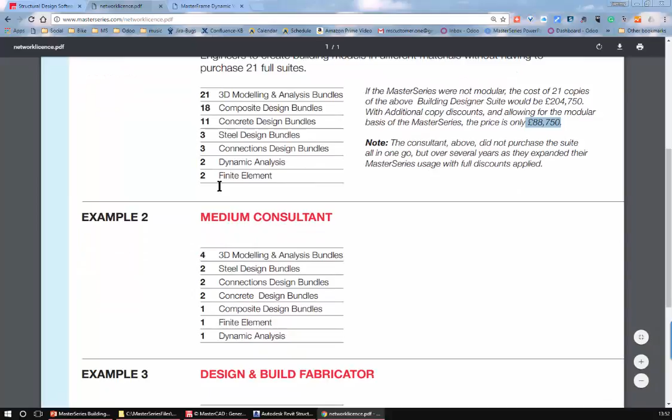Now in my UK prices, if I was to buy 21 copies of all of this, it would be 200,000 - crazy madness. But by taking in both the additional price discounts and the modular basis, they're able to get that 21 user suite for only 88,000. Sounds like a lot, but that's a very competitive rate, considering the amount of programs, connection design, finite elements all coming into the one system.

And then for your medium consultants, you can see a similar style. And even for these fabricators who use our software extensively, they may do a lot of connection design, but they do a smaller amount of bid design and build, and in their case maybe only one dynamic analysis. So it is modular and designed to give you what you need for the minimum cost.

It also allows you, because we don't penalise you for buying things later, to build up the system step by step. Start out with 1 copy, add your second copy, suddenly get a job that requires response spectrum analysis, add in your dynamic analysis, and away you go.